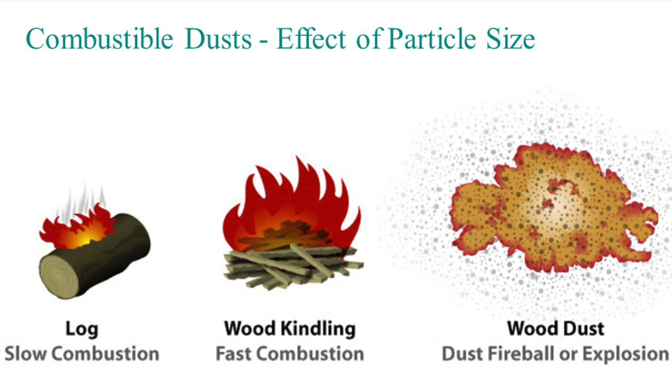I'll show you a simple analogy with a birthday cake that shows a lot of the ingredients in your kitchen are combustible dust, whether it's flour or powdered sugar—it's really how they're handled. Here, a grandmother's made a birthday cake for her grandson, George. She's made it a little unique: rather than putting icing on top of the cake, she's put a layer of powdered sugar, so that's a combustible dust. She's got candles on the cake—that's your ignition source. Well, you need something to disperse the dust. Guess what happens when George blows out his candles?

Happy birthday, dear George. Happy birthday to you.

Oh my gosh, what was that? Oh, I forgot about the powdered sugar.

I don't know if you heard the grandma at the end say, 'I forgot about the powdered sugar.' That's what can happen in our facilities. Luckily George maybe got some singed hair, wasn't a significant injury, but your facilities can have a lot of combustible dust, and if that gets dispersed and there's an ignition source, that same thing can happen.

I don't know, I'm always a little leery. He's got a smile on his face after this happened. Was this a stage video or was that real?

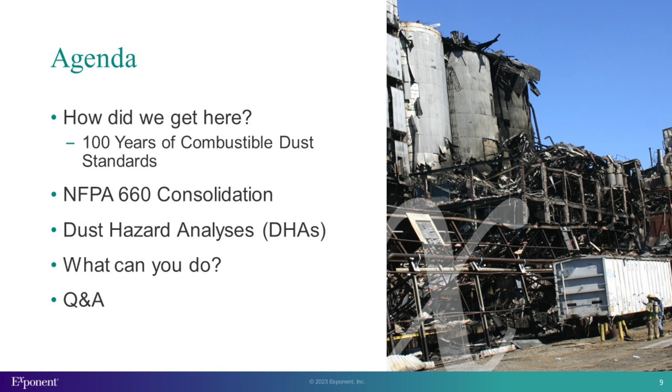So what I plan to talk to you about is a little bit of background of how did we get here. This year is actually the 100th anniversary of the first combustible dust standard for the agricultural industry, so it's really not a new problem. You'll see that over time there's been at least 3 waves where a large number of combustible dust explosions tends to drive a lot of activity on standards, training, and figuring out how to address these hazards. I'll talk about the consolidation process for NFPA 660 and how that new standard compares to NFPA 61, which is currently the agricultural dust standard that applies to you. Then I'll talk about dust hazard analyses that I imagine at least some of your facilities have started doing, and follow up with what you can do.

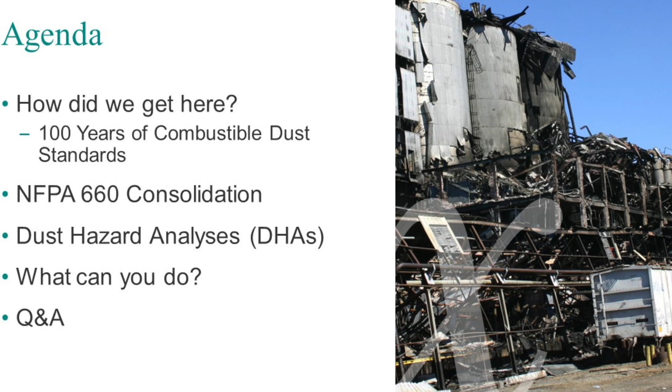So just a few things for those of you that aren't familiar. NFPA, which I'll keep referring to, is the National Fire Protection Association, a nonprofit organization that facilitates creating hundreds of standards. NFPA 61 is the current standard for agricultural and food processing facilities that applies to your facilities - that's been in place, or versions of it, for 100 years. NFPA 652, which you'll hear me talking about, is a standard on fundamentals of combustible dust, which is relatively new but would also apply to your facilities. And NFPA 660 is this new standard being created that combines standards from different industries into one.

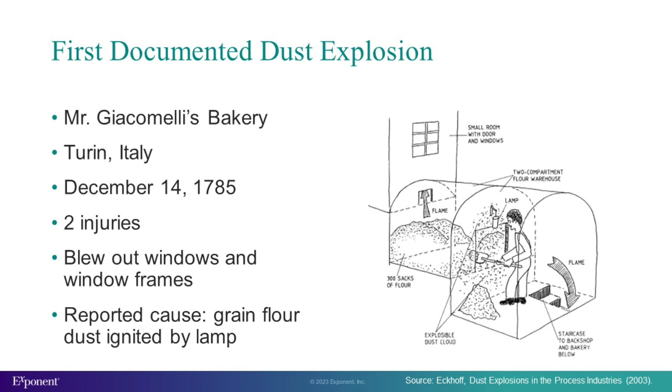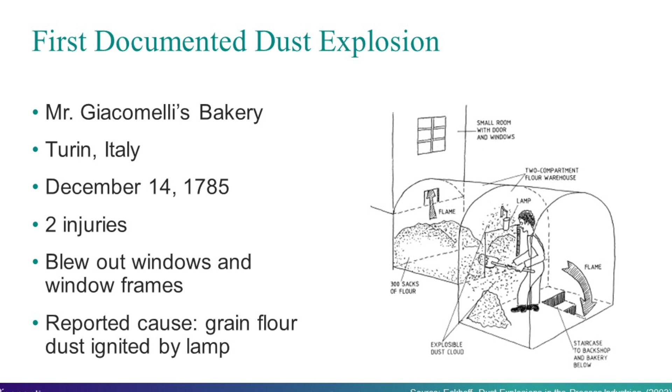So how did we get here? Like I said, this really isn't a new problem. The first documented dust explosion where there was an investigation written about was in December 1785, where a worker was shoveling flour at a bakery. There was a lamp, it ignited a dust cloud, blew out the windows. He received burn injuries. Another worker was on a ladder, got scared, fell down, and got injured. So this isn't a new problem.

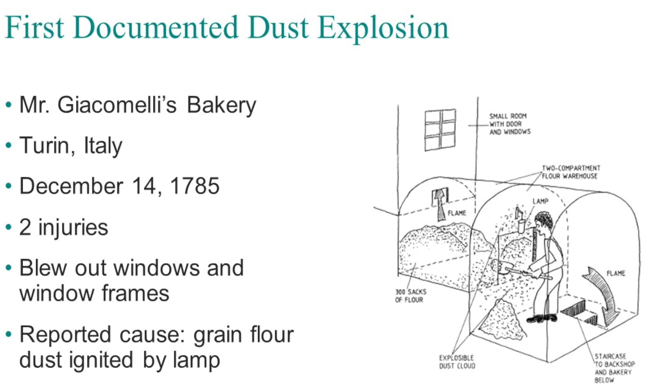Moving forward a couple hundred years, in 1878 in Minneapolis, at the world's largest grain mill at the time, there was a large dust explosion that killed 18 people. Around that time in the US, there was a lot of effort trying to understand what was going on - people didn't really understand what a dust explosion was. That continued in 1919, when there were 3 large incidents with multiple fatalities, which again got the attention of industry. So at that time, organizations - the Department of Agriculture, the National Fire Protection Association, and others - started researching what was going on and created the first committees to create combustible dust standards.

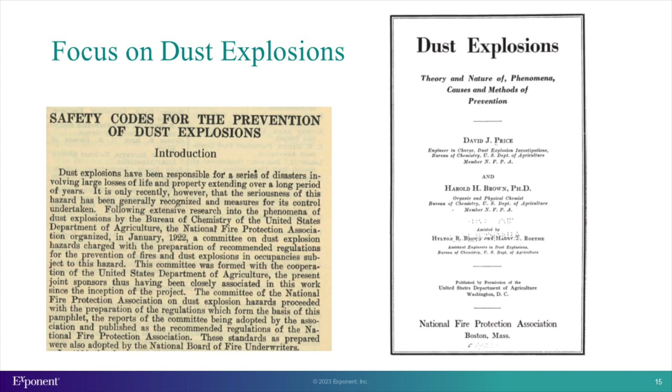One of the first textbooks on combustible dust was written, this 'Dust Explosions: Theory and Nature of Phenomena, Causes and Methods of Prevention.' That's really the time period when people first started to understand what combustible dust was and what were some of the things you could do to prevent dust explosions.

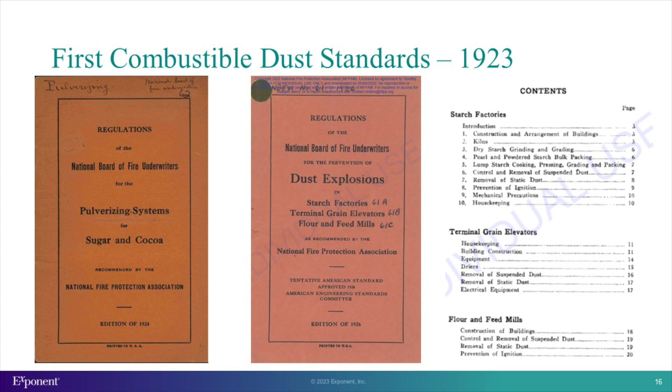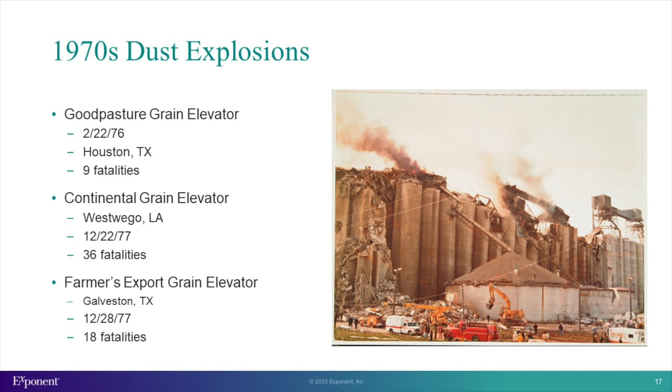These are things we still care about today, and protection against ignition sources or prevention of ignition. So fast forward, these new standards are in place, things are going well, and then you get to the 1970s where there was a large number of dust explosions in the agricultural industry that caused multiple fatalities. This again got the attention of industry, and caused a number of things - the NGFA was active in this, government agencies were active in this, trying to do a lot of studies understanding what's causing these dust explosions and how to prevent them. There's a lot of publications from this era about preventing dust explosions in the agricultural industry. Eventually, in 1987, OSHA created the grain handling standard, which still applies to most of your facilities today.

If you look at that time period - this is data from OSHA - you see after the late 70s, with this increased attention, there was a significant decrease in the number of explosions, injuries, and fatalities, and actually a lot of that happened before the grain handling standard. But this was seen as a success - OSHA sees this standard as a success that the industry has improved since that time.

Back in the 70s, there were a number of different NFPA standards that applied to agricultural dust - it's pretty messy up there. There were ones for country elevators, starch mills, feed mills, and mills for human consumption food. In 1995, all of those standards were combined into NFPA 61, which is the current standard that applies to your facilities. So there's a history of trying to join the common elements of different industries and standards to create one combined standard.

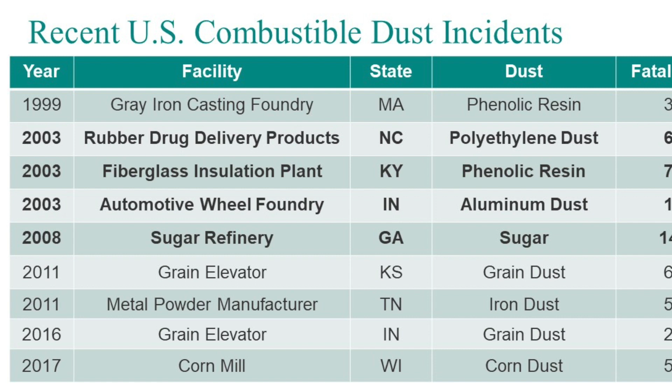Fast forward to the late 90s, early 2000s, we had another rash of combustible dust explosions, not necessarily all in the agricultural industry. This is a list of a number of dust explosions over about 20 years. Some were in the agricultural industry, but I think the ones that really first started getting the most attention were in 2003, when there were 3 catastrophic dust explosions in different industries with different types of dust.

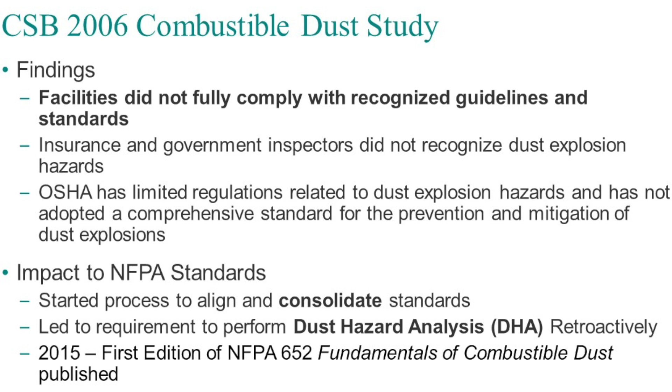A new agency at that time, the Chemical Safety Board, investigated those explosions and decided to do a study on this topic. Then in 2008, there was the Imperial Sugar explosion where there were 14 fatalities, which again got the attention of industry, standards writing organizations, and regulators.

As a result of those 3 explosions in 2003, the Chemical Safety Board decided to do a study on the general topic of combustible dust. Some of their findings are really driving what we're seeing now with the combination of standards and requirements for a dust hazard analysis.

One of their first findings was that facilities did not fully comply with recognized guidelines and standards. They felt it's not that we don't know what to do, or that there aren't standards telling you what to do - it's that a lot of industry just isn't aware of the hazards, isn't aware of the standards, and doesn't know how to protect the facilities. This was true for some of these facilities.

OSHA had recently been in CTA Acoustics, which was one of the explosion sites in 2003. They cited them for things like lockout, tagout, but nobody recognized all the combustible dust around the facility. Same for the insurance companies that were there. So a lot of safety professionals that you would have expected would notice these hazards just were unaware of them.

At that time it was pointed out that OSHA doesn't have a general industry combustible dust standard, although there is the grain industry one.

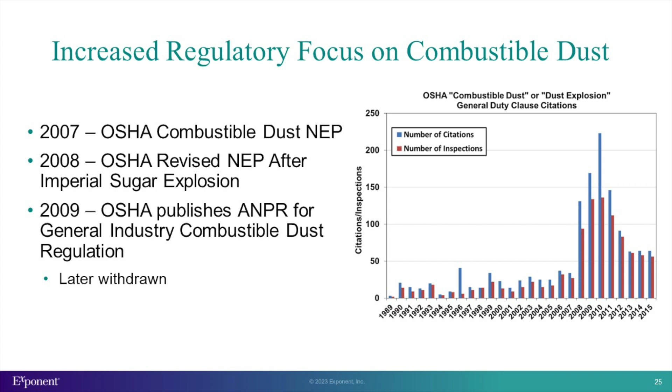This had an impact on NFPA standards. There was discussion about starting to align and consolidate standards because people were concerned - why is there a different standard for wood dust, for plastic dust? Why do we need to do different things for agricultural dust? In some cases you do, but there really should be more commonalities, particularly for companies that may handle more than one of these types of dust in one facility.

Most of you primarily handle agricultural dust, but you may have a wood shop or wood saws that have wood dust. Some companies have plastic container manufacturing as part of the process, so different processes or different standards would apply. To address the issue that facilities just weren't aware of the hazards or didn't know how the standards applied to their facilities, they created the concept of a dust hazard analysis - essentially a requirement that you look at your facility, look at the hazards, and see how it complies with industry standards like these combustible dust standards, to make sure you're identifying hazards and have mitigation methods in place.

As part of the aligning process, the first step was a standard in 2015, NFPA 652, Fundamentals of Combustible Dust, which tried to take the common or fundamental elements of the different combustible dust standards and put them into one standard. All the other standards aligned so they had the same table of contents. So at least while the standard requirements might be a little different, you could look at the same place in the different standards for the same type of information.

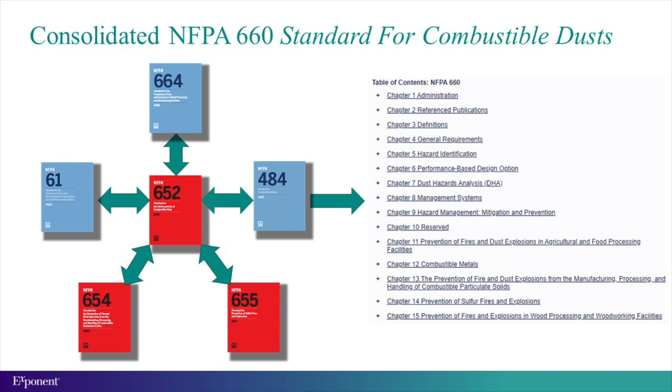That was how we spent a lot of our time during early COVID on these remote meetings discussing standards - very exciting stuff. Then from that, we created a draft standard that was published that anyone in the public could provide input on things they think should be changed. Those public comments were due in January of this year. Then the various standards committee meetings reviewed that public input, made revisions to the standard, and balloted that. Right now, those changes were approved. There wasn't a lot of controversy on those types of items.

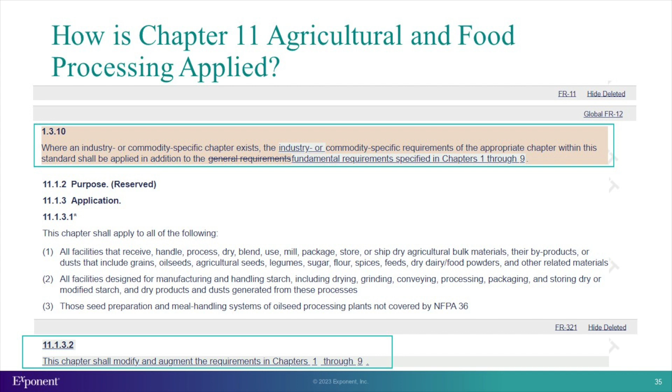So I'll show you an example of how these requirements may be different. In the fundamental chapters, Chapter 8, there's a section 8.5 on hot work, and then section 8.5.6, which is use of portable equipment. An example of this may be you have an area in your building that, because it has combustible dust, is a Class 2 Division 1 area or Class 2 Division 2 area that requires special electrical equipment. You've got an employee that wants to go in and use a cordless drill or a screwdriver.

Chances are, if you look at the side of that tool, it's not going to say that it's appropriate for a Class 2 Division 1 or Division 2 area. So the way the fundamentals require this is that you would then need to use a hot work permit system, similar to what you might be using for cutting and welding, before you use that drill in that space.

The agricultural standard thinks that hot work permit system's a little bit overkill for using that—this might be a lower hazard using this drill. Yes, it could be an ignition source, but it's not as severe as using a torch or doing welding. And so they have alternative requirements in section 11.8.5.6.

For use of portable equipment, while it is spelled out in more detail here, it's actually more lenient and doesn't have all of the requirements of the formal hot work requirements for cutting and welding. So in this case, the facility can follow the requirements in the agricultural section, Chapter 11, for doing this type of work.

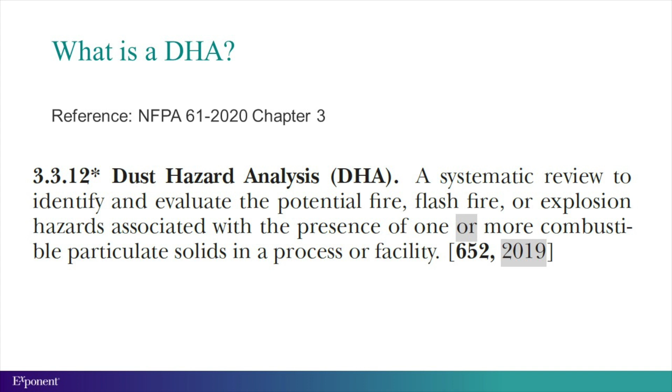What mitigation methods do we have in place? How does this compare to the standards? And really what you're trying to do here is you're trying to eliminate sides of the explosion pentagon.

Hopefully you've seen this example before, but to have a dust explosion, you need 5 elements, which is called the explosion pentagon. You need the combustible dust, you need an oxidizer, which is typically air, you need an ignition source, and you need dispersion that disperses that into a cloud.

With those first 4 elements, you can have the flash fire like little George had in his face when he blew out his birthday cake. If you have that 5th element, which is confinement, that stops those hot gases from expanding, then you can have a pressure rise and have an explosion.

Some of the common ways you address these issues, you want to remove at least one, if not more, of these sides of the pentagon. Inherently safer design would be this concept of, we have a combustible dust, is there another way we can do this process where we don't have to have the combustible dust? Can we eliminate that? In the agriculture industry, that's not really probable because your material that you're handling is combustible.

Eliminating oxidizer. In some types of vessels, you sometimes use inerting, where you use an inert gas to reduce the level of oxygen so that you can't have combustion.

Ignition source control, that's why you have various forms of ignition prevention, trying to control hot work, trying to control devices like hot bearings or hammer mills that can be ignition sources.

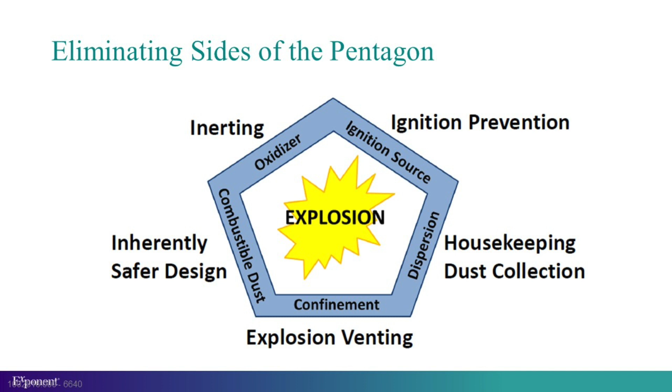The standards also describe who can lead a DHA. It says the DHA shall be performed or led by a qualified person. It does actually define qualified person in another part of the standard, but there's some annex material which you can tell by that asterisk. It points you to Annex A.7.2.2, which spells out in more detail who can do a DHA, what qualifications they should have.

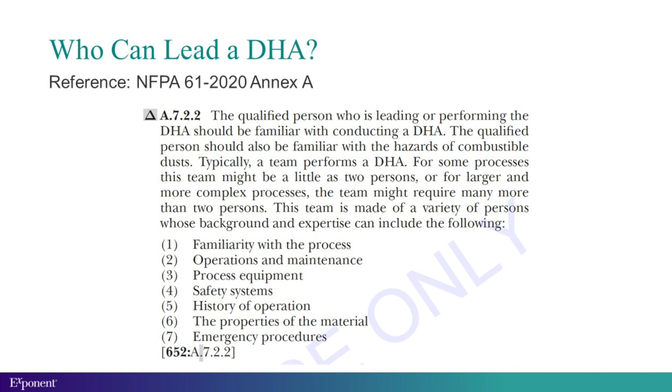And oftentimes this is going to be 2 or more people. You want to involve people that know about combustible dust and the DHA process. You want people that are familiar with your process, maybe your maintenance, safety system, history of problems you've had at your facility. So really the DHA is best when it involves all those different inputs.

In a small facility, that's not going to be 10 people. In a large facility, maybe it would, but it's typically at least 2 people. So it spells out the understanding you should have and the types of experience you should have in the standard.

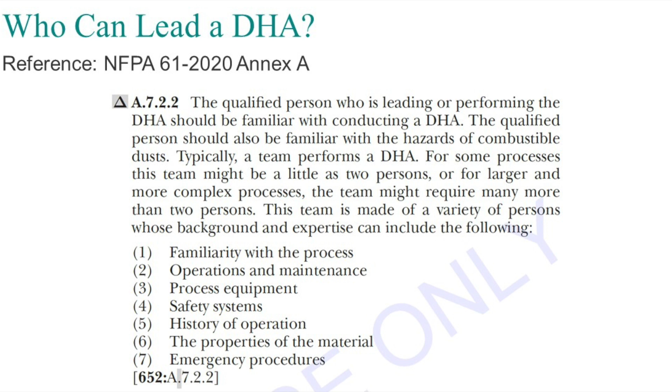When do I need to perform these? So I assume some of you perform these, but not necessarily everyone. Based upon the current edition of NFPA 61, you should be performing these for new processes or processes that are undergoing significant modification, and that's actually been in place since the 2017 standard, that for new processes you should be doing this. And then there's a retroactive requirement, which is a bit unique in NFPA standards, that by January 1st, 2022, so already in the past,

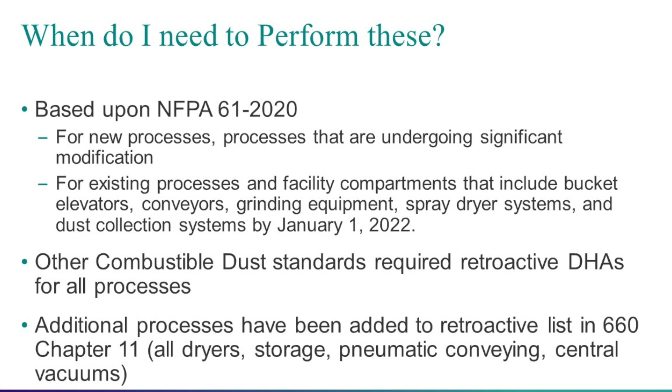these should have been performed retroactively on existing facilities for certain types of processes in the agricultural industry. So these are processes that we felt were the highest risk type processes in your facility where you're more likely to have an incident. So things like bucket elevators, conveyors, grinding equipment, spray dryers, and dust collection systems.

I won't ask for a show of hands, but I imagine there's a number of people in the room where your facilities haven't all done this. So not everybody has done this. A question came up when we were discussing this yesterday. Who requires you to do this?

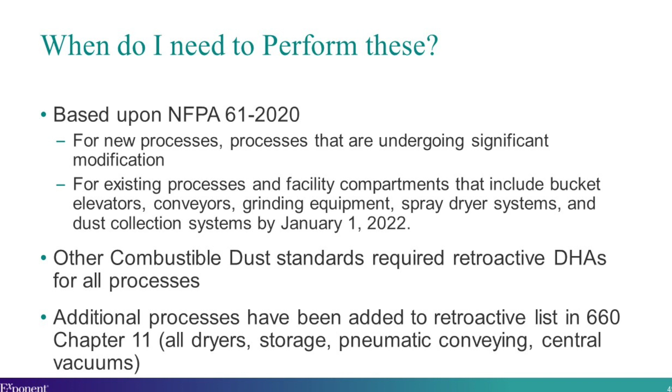The NFPA standards are consensus standards, and so they become a legal requirement to you when they're adopted by an authority having jurisdiction, like your building code officials or fire code officials. But there may be other AHJs, authority having jurisdictions, that want to apply this to your facility. Insurance company may want you to comply with it. So it could be a variety of different people forcing you to do that.

Other combustible dust standards require retroactive DHA for all of the processes in the facility. So that's one of the differences with the agricultural portion of the standard. It's just having you do this on what are seen as the highest risk processes. Over time, you may see that list expand, and actually for the new version of NFPA 660, currently they've added all dryers, storage, pneumatic conveying, and central vacuum systems as additional existing processes where you would have to complete DHAs.

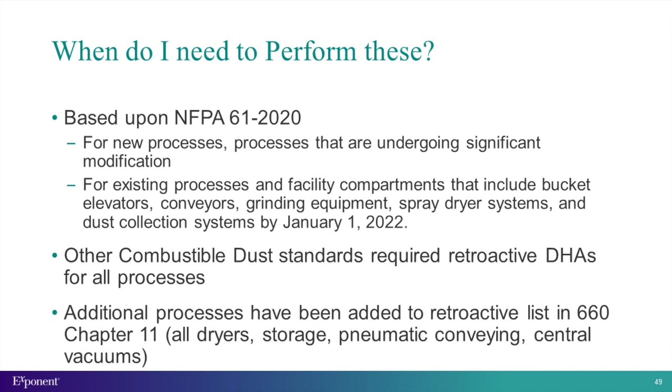What's included in a DHA? Chapter 7 spells this out. It needs to include a number of different things. You need to identify and evaluate the processes or facilities where you have fire, flash fire, and explosion hazards. Where you have those hazards, you need to identify safe operating ranges for your facility. So for a dryer system, that may be your temperature limits, your temperature controls.

Identification of the safeguards that are in place to manage fire, deflagration, and explosion events. So that might be ignition source control. It might be fire suppression systems. It might be explosion protection systems. And then recommendations and safeguards where warranted, including a plan for implementation.

And that's going to be an issue of how you deal with those issues, so that 5 years from now, you don't just have a list of things you said you need to address that nothing's been done on.

One of the important things the Agricultural Committee really pushed is that it should be permitted to use a checklist to complete a DHA on agricultural combustible dust. NFPA 61 and 660 will include example checklists of how to do a DHA. Some companies have created their own checklist for their own types of facilities to go through this process.

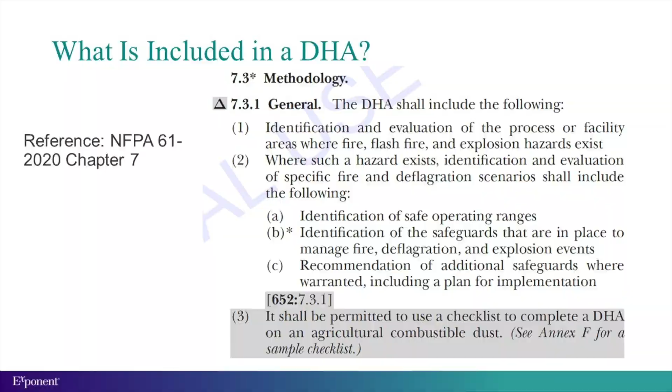So in practice, how do you do this? You go through your process and identify where you're handling combustible dust, where it's present, or you suspect it'd be present. For some industries, this may involve testing to determine if the material is combustible or not. In the agriculture industry, oftentimes you know whether it is or not—there's a lot of historical data in NFPA 61 that provides you some of those properties.

You typically want to divide your process into individual nodes, smaller pieces you can look at in more detail. For each node, look at the 5 elements of the explosion pentagon: where are they present, where can we eliminate some of them, what safeguards do we have in place to prevent these? Then compare those safeguards to the NFPA prescriptive requirements and best practices to see if we're doing the things typically required, and where necessary, propose additional safeguards or propose evaluation of additional safeguards.

You can do this using many different types of methods. The simplest is a checklist. You can use what-if type analyses, saying what if this temperature is too high, what if it's too low, what can happen. You can use a failure modes and effects analysis, or a HAZOP analysis, which is common in the chemical industry. Depending on the complexity of the process, you may want to use different techniques or multiple techniques.

It's clear that when a lot of people hear you need to do this dust hazard analysis, they think of OSHA's process safety management standard. This isn't meant to be the PSM standard for all dust. There may be some dust where you should follow a PSM process, but by and large, you don't need to be doing that for most facilities.

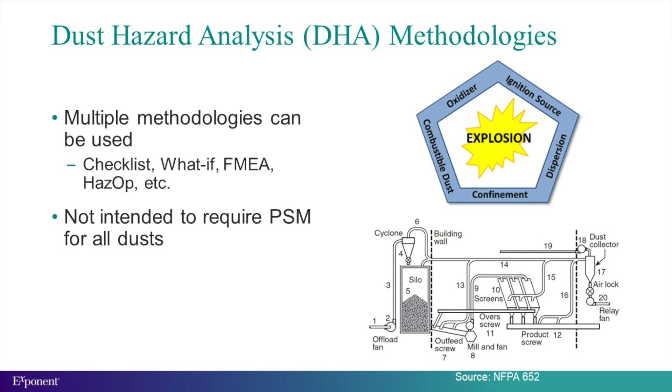As I mentioned, the current version of NFPA 61 has a 12-page DHA checklist in one of the appendices. This is an example that was put together of what you could use on a facility. This will be revised for the next edition of the standard, and I think there may be additional ones put in for different types of facilities. But again, a lot of companies with multiple facilities will probably create their own checklist to apply to their different facilities so this work can be done.

So then the question becomes: I completed my DHA, now what? This is something we're seeing more and more, where we're contacted by companies as consultants saying, hey, we did the DHA 2-3 years ago, it came up with some recommendations, the people that did the DHA aren't with the company anymore or they're in a different role—do we really need to do these things? How can we address these? What are the ways we can handle these?

So it's really important when you have these elements that you develop a plan to analyze the recommendations. Oftentimes the findings are going to be that you don't meet this prescriptive requirement of NFPA 61, or you don't meet that one. As I mentioned earlier, there is some flexibility in the standards.

In some cases it may be easy—yep, we can just fix that, we can put on an explosion vent, or we can put up a sign we don't have—it's easy to fix. There may be other cases where it's like, wow, that's going to be a huge capital expenditure, or we have the same issue throughout all of our facilities, we've never had an issue with this—is this really something we need to address? That's where it may make sense to do further analysis of those issues to really understand the level of risk and whether there are other alternative methods you could use to provide protection or not.

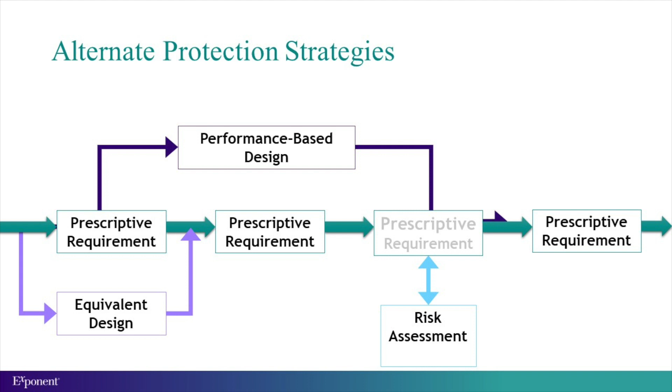So what are the next steps? What can you do? One, I would encourage you to look at the current edition of NFPA 660 and see what's there. You can review that for free, and then by January 6, 2024, the public needs to put in any public comments on changes they want to make.

Since this is the second draft, you can't just propose changes to everything. You can only propose changes to things that were considered or changed in the previous draft, so you need to comment on things where there was a public input in the past, where maybe the committee accepted it or didn't accept it.

Or where there's a committee input, where the committee's telling you, hey, we're thinking about doing this, what do you think? An example of that is the DHA checklist for different types of facilities. And then any place where the committee made a first revision, you can comment on that.

A key thing when providing public comments: it's really not that helpful to just say, this sucks, I don't like this. What you really need is to say, I disagree with this for these reasons, and here's the alternative language I'm proposing, or this section should be deleted. If you're not proposing specific language, the committee can't really act on it - they'll just decline it if you're not providing a specific change.

And then the other thing I'd encourage you to do is to complete DHAs on applicable processes in your facilities, whether that's new processes as you're building them, or some of these historic existing processes that the 652 or 61 committee identified as being higher risk. Then evaluate and act upon those recommendations.